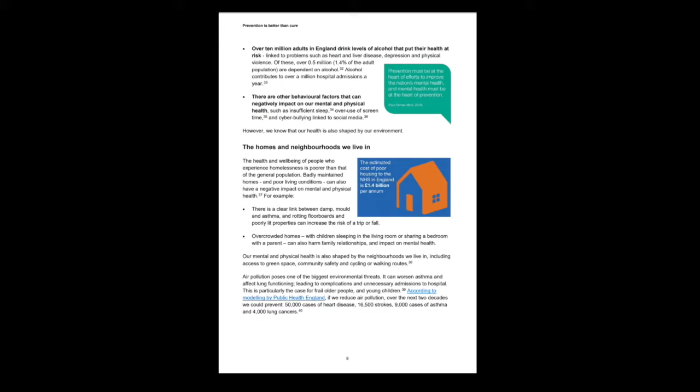If you find page 9, you'll see they're basically saying that poor housing is contributing about 1.4 billion to the NHS. So let's not be under any illusions that our built environment has a massive impact upon our standard of living, our health, and our well-being.

Okay, so let's try and break this down a bit. So direct health issues, a lot of these we've touched on already. Off-gassing - let's try and understand there's a lot of stuff that is still unknown out there in terms of what our paints give off, what other manufactured products that we're bringing into our homes give off. There's a lot of talk about formaldehyde, etc.

We've heard a lot of this before. There's now enough opportunity to find, maybe not know all of the effect of the products we're bringing into our environment, but there's actually enough materials out there that we could choose that don't off-gas. A lot of the natural materials represented here today and part of the ASBP don't off-gas.

It's quite useful because it means we're not stuck with loads of trees that don't break down into component parts, and the same with all other biomass generally grown on the planet. Bit of an inconvenience if that was the case, we'd go around lighting loads of fires. Very unuseful at home though, because fungus generally we don't want that stuff in our houses - it breaks down the materials around us and can have a serious effect on our health as well.

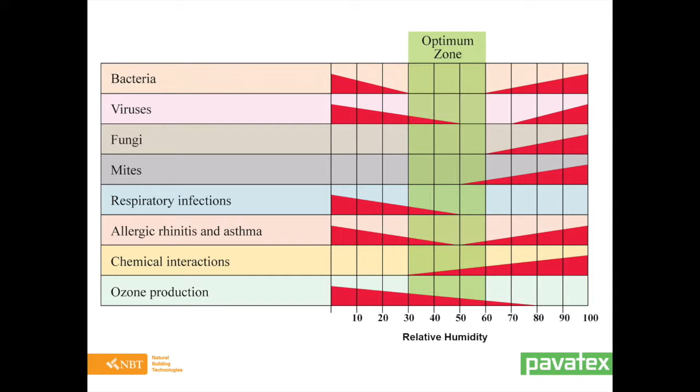There's actually a broader implication of this, which Mark's already shown, so I'm not going to go into detail, but I would just point out that at 50% relative humidity, where most species of virus and fungi can't proliferate, is actually where you and I are most comfortable - around about 50% relative humidity. So if we improve the level of performance of our buildings, not just based on thermal but also on relative humidity, you'll have a far more comfortable, far more healthy built environment.

Bit of a problem with moisture though. This was a building study done by the BRE - it was a timber frame building built in Wales in the 60s. Some bright sparks thought they should improve the thermal performance of the building, sounds a great idea. Unfortunately, they wrapped them up in a closed cell product, like a tea cozy from the outside, and within just 6 years the buildings had rotted out. These buildings have now been razed to the ground - they no longer exist because they became literally unstable and unfit for human habitation.

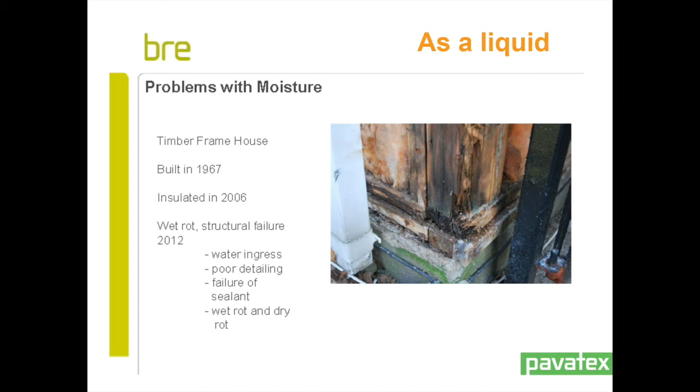Irrespective of the health impact of a building falling on your head, there's other implications in terms of the mold and the breakdown and so on.

I'm going to skip through these slides quite quickly, but I just want to show you the complexity of moisture within the built environment. This is when you're insulating a wall, a solid wall, on the inside. We actually have 9 million solid walls still in the UK. A fabulous statistic is we have pretty much the most inefficient housing stock in the whole of Europe.

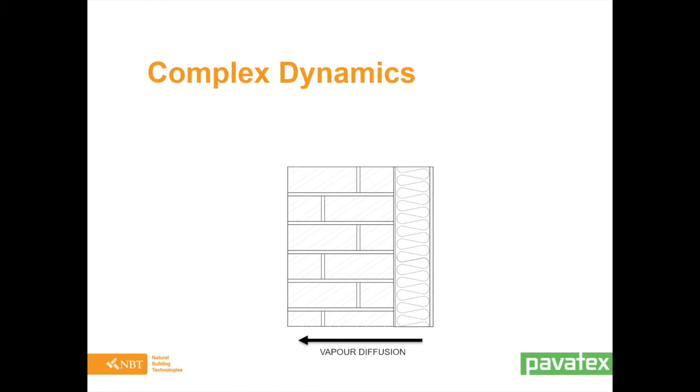One way is to improve thermal performance with internal wall insulation. It's a good move, but beware, please. First of all, we've got vapor diffusion coming from the inside outside. You're looking at moisture vapor entering the building fabric. You've now got a colder wall, so you could get interstitial condensation forming. The industry often treats that with a vapor barrier, which aren't very effective. So we really need solutions that allow moisture to get out more quickly than they got in.

These are some of the benefits of natural materials, but big health warning: just using a material that is breathable is not the end of it. You need to understand the building physics. You need to make sure that the right material is used in the right place. I'd encourage you to understand the building system rather than just an insulation material.

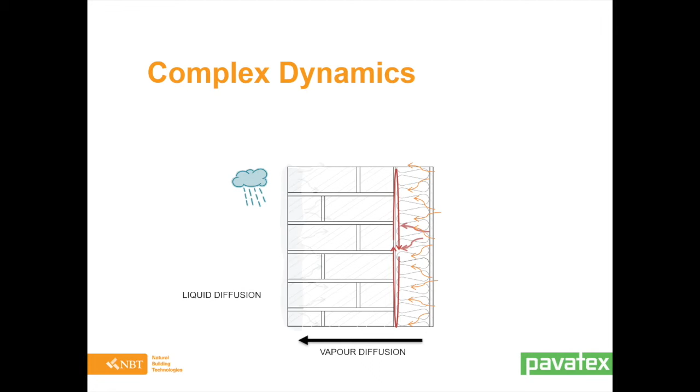Just to complicate matters further, it rains, and that creates liquid diffusion into the building fabric, and then the sun comes out and drives some of that moisture off the wall, but also drives some of the moisture into the building fabric. You've insulated on the inside of your building, so you've reduced the heat load into that wall during the winter months, therefore you're increasing the moisture load in that wall during the summer months. That needs to be understood as well.

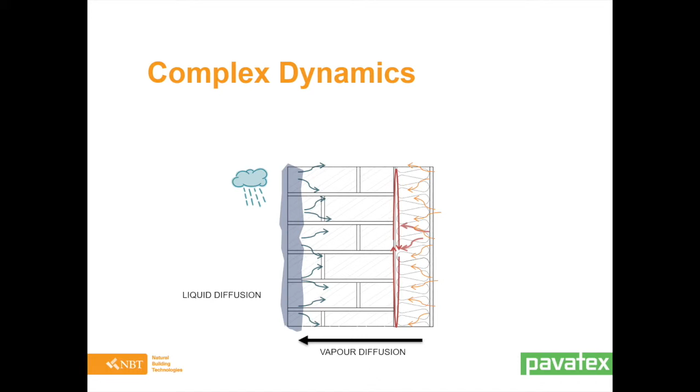So it's complex, it is actually fairly easy to resolve, but it needs to be understood. Somebody said the other day, it's not rocket science, it's way more complicated, but it can be solved, and that's important.

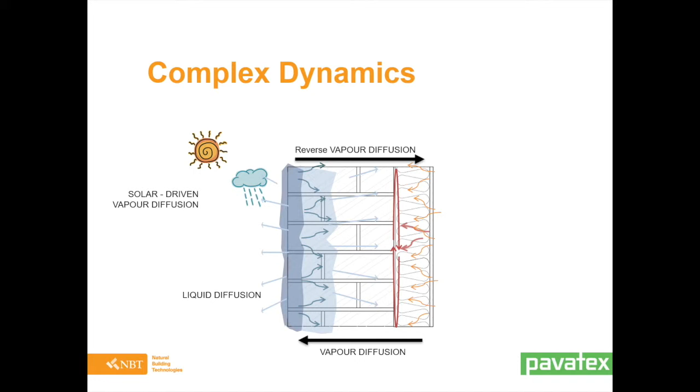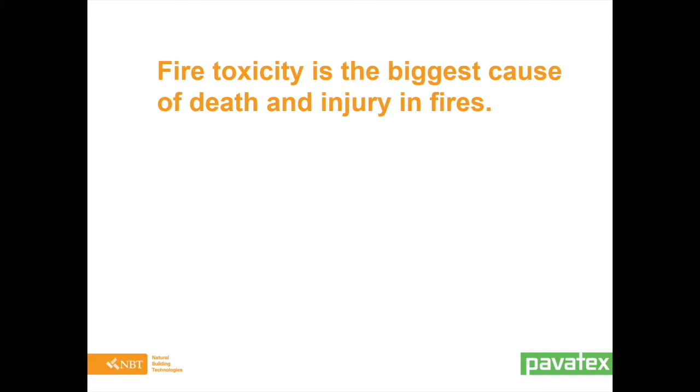Next one we've already touched on as well: fire, a bit of a health implication. You may or may not be aware, but fire toxicity is actually the biggest cause of death and injury in fires. There was an ASBP conference last week, which was excellent, and fire came up as a big one. It was important to note some of the research presented to us, that a lot of the standard insulation materials we see put in our buildings, as well as other materials, have a really high level of toxicity when they burn.

Gary mentioned earlier, natural materials are classed as combustible, but it's not just about the fact that it burns, it's how it burns, what materials are being given off as it burns. A lot of cladding is held onto a building with something called helping hands, like aluminium brackets in effect. Aluminium melts at 600 degrees C. Building fires are between 700 and 900 degrees C. So you're talking about a non-combustible material that will fail catastrophically and quickly in a building fire.

Just because it's non-combustible does not make it safe, and we need to understand this. PVC is pretty much non-combustible, but in a fire, it's a chemical disaster, and will actually kill people before smoke gets to them because of the off-gassing coming off it in the fire. PVC has not been banned when the government banned combustible materials over 18 meters.

We did an 18-meter fire test, so we basically built a huge wall and set it on fire. Well, we didn't actually, the BRE did, in a controlled fire test using wood fibre insulation, and it passed the at-height fire test. We can't use that because it's now been banned, yet it would be argued that it is actually a safe solution for the built environment.

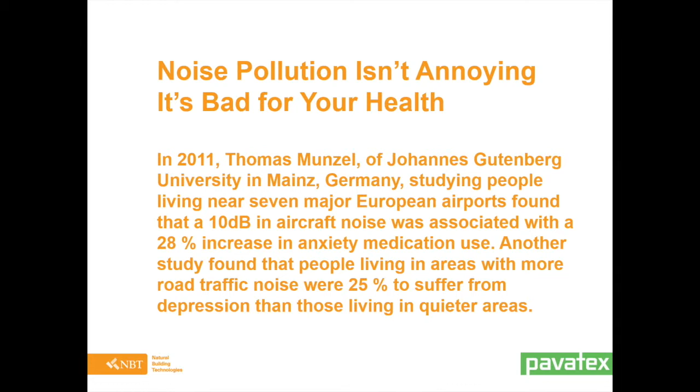One of the benefits already highlighted today about these natural materials is the fact that it performs incredibly well acoustically.

Okay, indirect health issues, just thought I'd touch on this.

Pollution, plastics, another big topic at the ASBP conference. We had Emily Penn speak, I'd recommend you look her up. These are a couple of her slides.

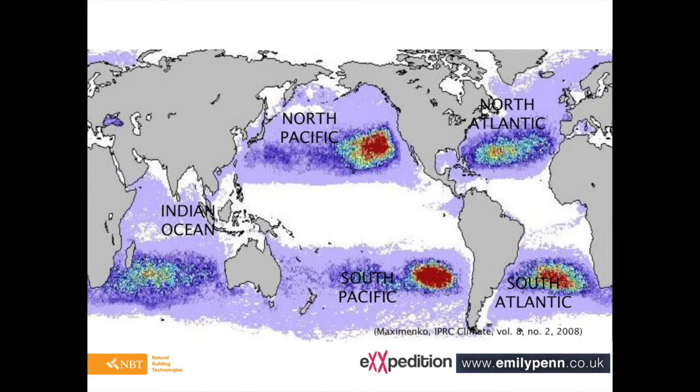Not on the surface, but they do exist under the surface at a scary volume. So they catch fish, find loads of plastic in the gut of the fish, they do x-rays of plankton, only to discover that 2 of those bits are actually plastic. It's because the plastic gets broken down into lots of little pieces but still remains part of the ocean, and it's very good at attracting a load of nasty stuff.

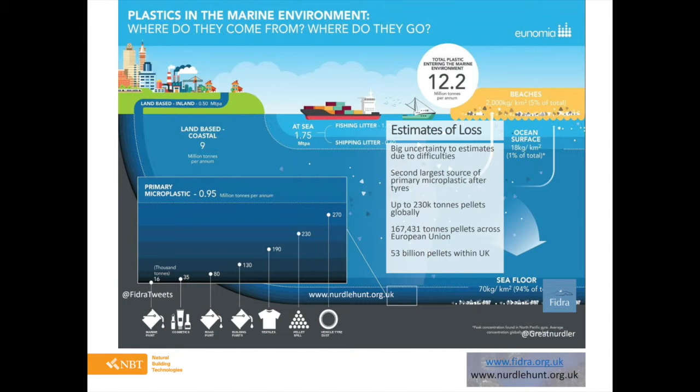12.2 million tons of plastic go into our oceans every year. Plastic is a brilliant material - I grew up with a background in design, loved the stuff, extremely useful, extremely effective material, solves a lot of problems. But the way in which we use it has to change, and the way we use it in our built environment has to change. We need to look at ways of limiting that, which is why we're here today.

Indirect plastic and CO2, it's a bit of an elephant in the room. If you want an extra elephant in the room, I'm going to do a final plug for the ASBP.

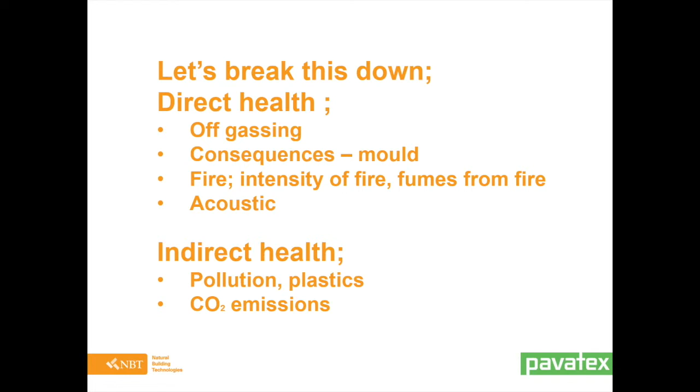At the end of the conference, Gary, who closed the meeting, drew our attention to a young lady - it's a TED talk, I'd encourage you to go and listen to it, it's about 10 minutes of your time. If a 16-year-old can explain so clearly why we've got to get our act together, I kind of feel like we've run out of excuses. So I would seriously encourage you to listen to that.

And then the reality of what she says is basically, we've got the solutions, we just need to use them.

Quick stat for you: about 1.2 tons of carbon gets locked up for every ton of product of wood fibre. I'm not trying to just plug wood fibre, this is the case with a lot of natural materials, it's just the one I really know about since that's my day-to-day. That's after it's been shipped over - currently we have to make it in France and Switzerland, so that includes the transport. If we were to make it in the UK, we'd reduce that, or increase the CO2 lockup even further.

Well-being, I'll sort of wind up now. Again, acoustics, we've done that already. Summertime overheating, which Chris did a great job on earlier - just a quick recap, there are 3 ways you generally find your building overheats: too many people, too many appliances, so it's an internal thing.

Solar glazing, so fenestration basically - south is something you can sort out with a bit of fenestration, but east-west is tricky. The final one is frankly just heat directly going through the building fabric.

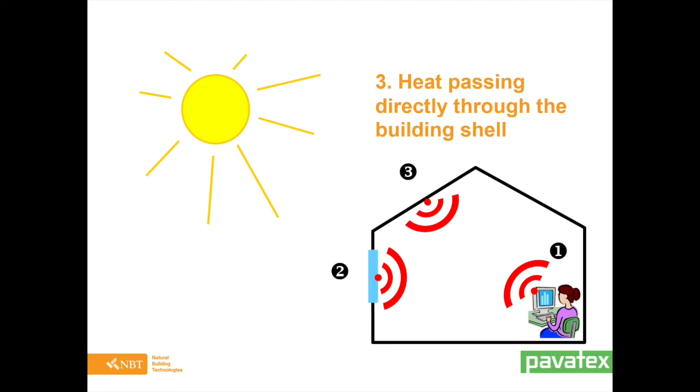The amount of energy the sun throws down on your building in summer is ridiculously greater than the little boiler in your house keeping you warm in winter. That's the reason why insulation in the roof doesn't keep the heat out - it changes. It's not about convection, which is generally how insulation works by trapping air, it's actually about soaking up heat and conduction.

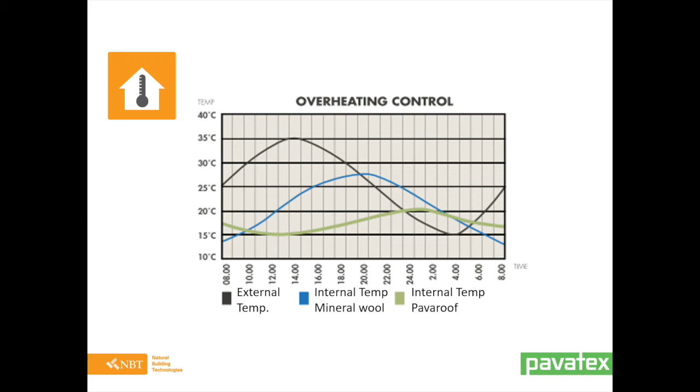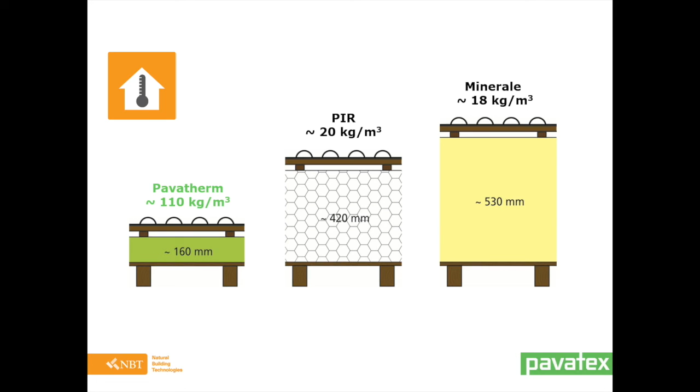So that's a little graph - the black line is the external amplitude, the blue line is if you fill the roof with mineral wool. That's the decrement delay, those 2 peaks that Chris talked about earlier. You can see a much more stable line using a high mass material, in this case wood fibre. To give you another example, if you were using about 160 mils of wood fibre, that's how much PIR and how much mineral wool you'd need to create the same level of decrement delay and keep your building cool in summer as well as the performance in winter.

So I hope you've got the basic message, which is that insulation does a lot of things, and it's worth thinking about all those things because they have a huge impact on the title I've been given - our health and our well-being - as well as the performance of our buildings and the environment around us. So thanks very much for your time, and I'll step down. Thank you.